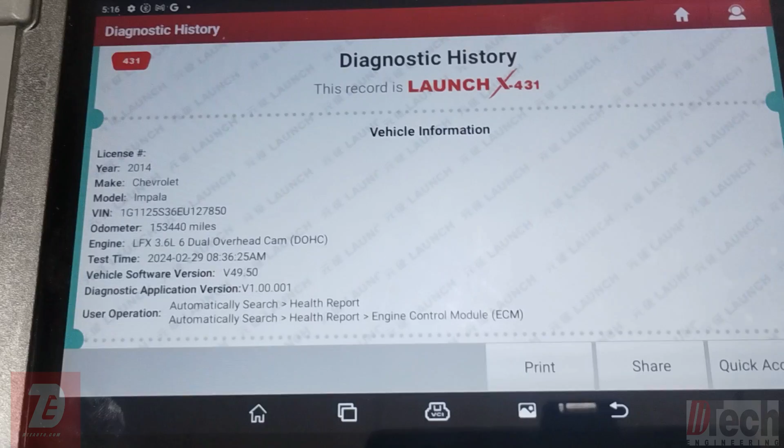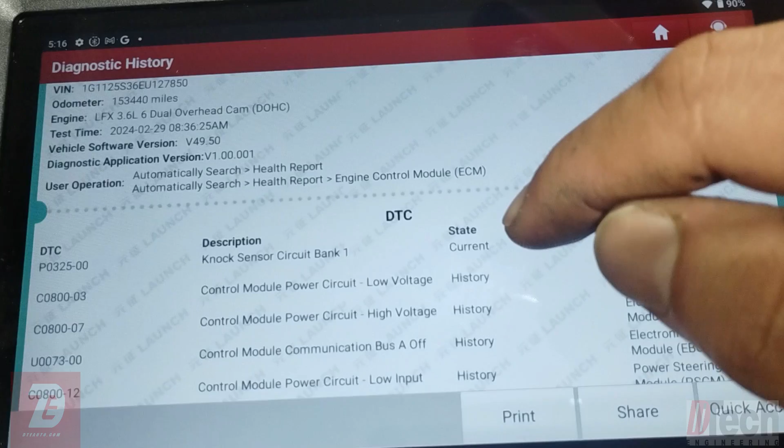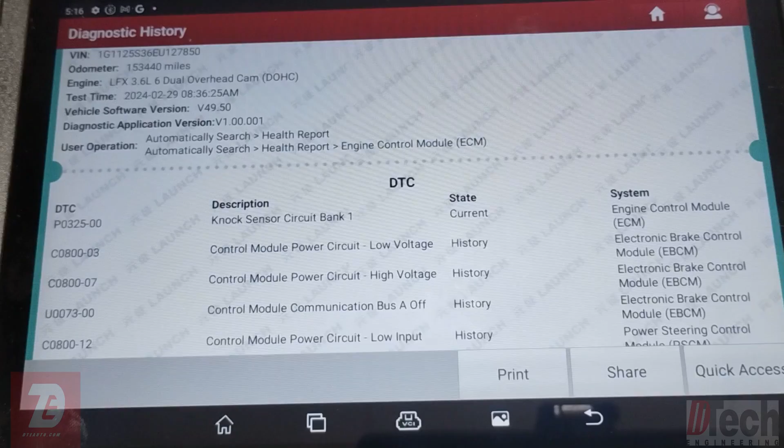They've done a few things on it trying to rectify the problem, but they still keep getting a trouble code. Here in the engine computer, currently present, it's a P0325 knock sensor circuit bank 1. And if I'm correct, I believe they were also getting the same code for bank 2.

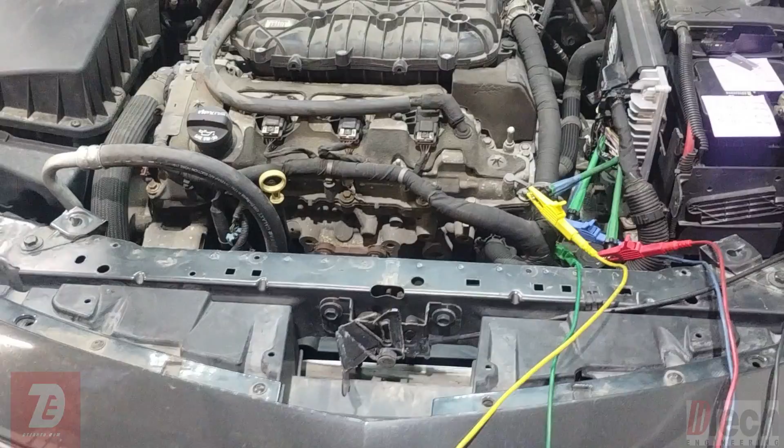Some of the things that they have tried: knock sensors, computer, jumping the wire harness, and then I told them to get a set of factory knock sensors, and supposedly they were still having the same issue. So that's when they decided to bring it down to me, and this is where we are at.

This is my first time trying to diagnose a knock sensor issue on one of these GMs. So my approach is to take a measurement of the circuits for each bank and just see what's on there and take a look. Just to get you a quick shot, this is the computer.

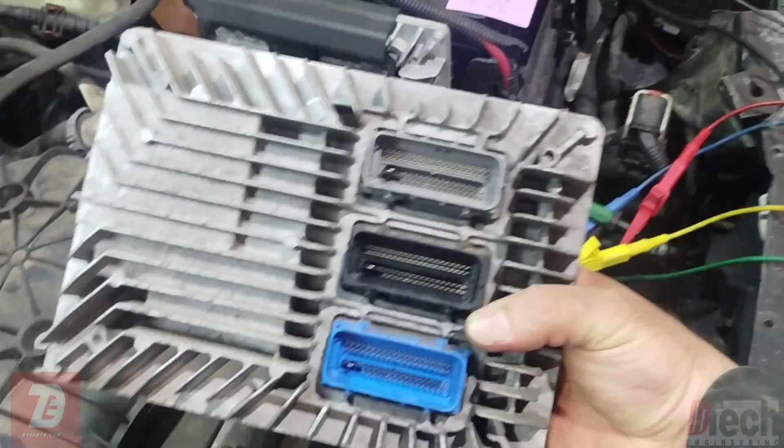I told them leave it in the car, and you can tell they've got a freshly painted one in there, but of course that did not make a difference.

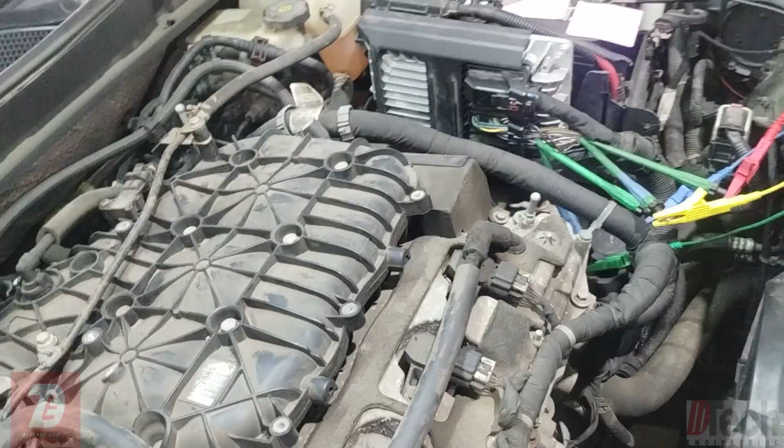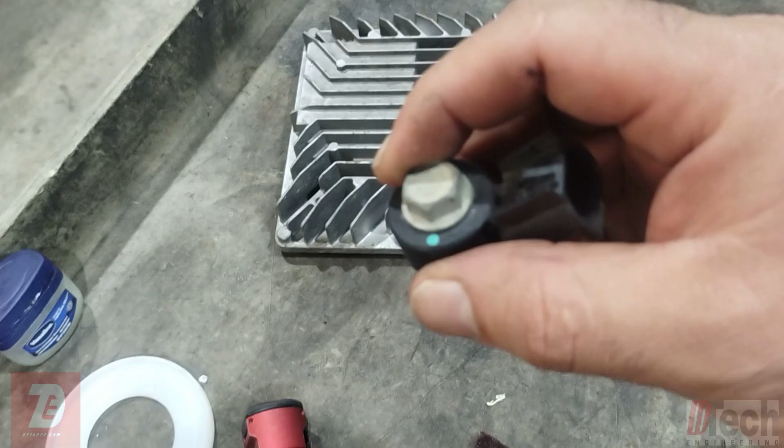I believe this is, not sure if it's the one I took off of the car or what. I have a used engine over on the other side where I took the knock sensors off while doing some testing, so I'll get you a shot of that. But for now, let's see what kind of signals we get.

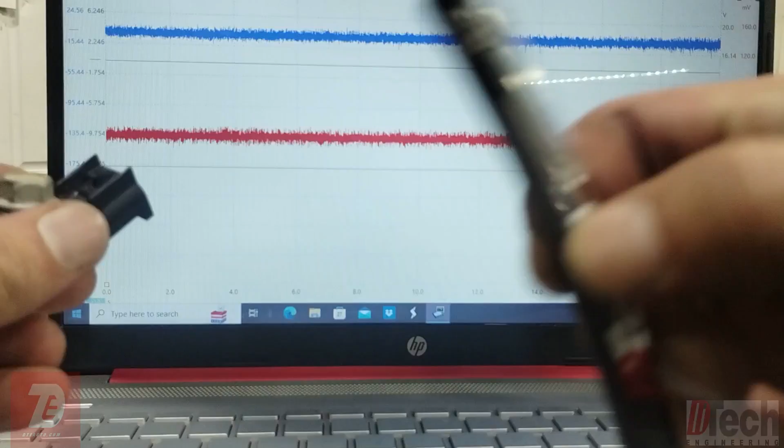Now, as far as testing knock sensors or this knock sensor system, it's no different than the chassis leads that I hook up to the scope. So all I have to do is tap into the signal line and basically just knock on the knock sensor, and we should generate a signal on there.

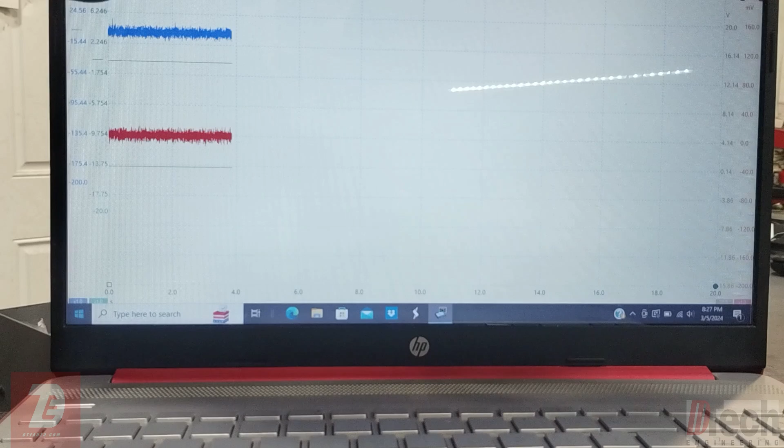As far as my channels, the blue is bank 1 signal line, the red is bank 2 signal line, and then, not for this first step but later, I am monitoring what they're calling the low reference, or basically the ground for the corresponding one. So green is going to be the ground for bank 1, and the yellow gold channel is going to be the ground for bank 2 on the red channel.

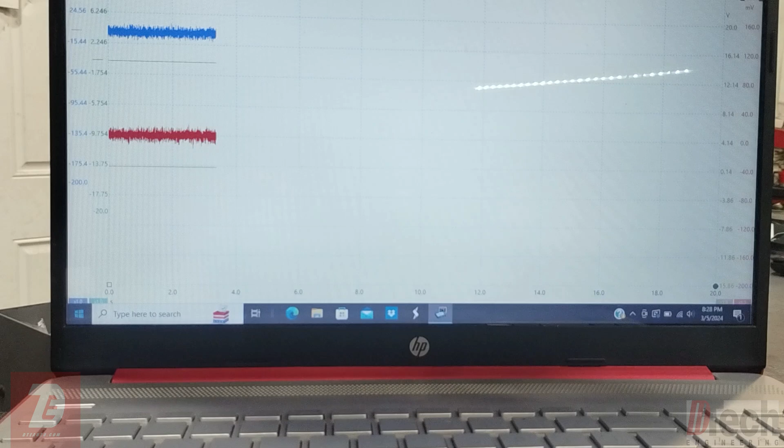So for right now, I am going to go and tap on the knock sensors and see if we can generate a signal. I'm tapped into the wire up at the computer, so we're all the way back up the harness right at the basically entry point of the computer. So we're going to try to capture everything up to that point.

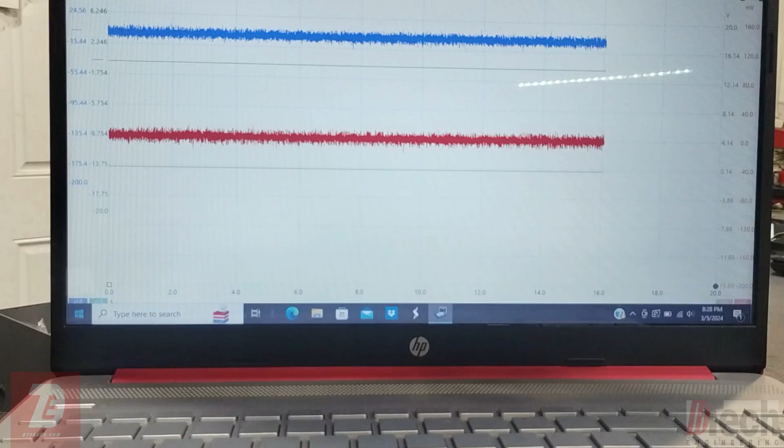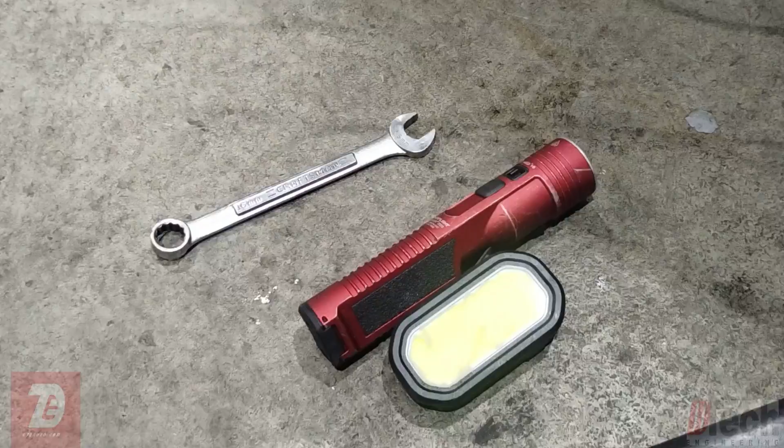Alright, so we're going to go underneath. I'm going to get you a shot of the knock sensors, and I'm going to use this wrench to knock on it.

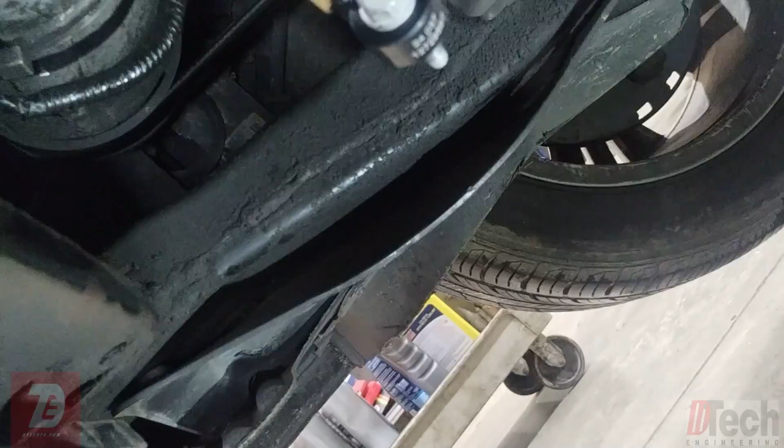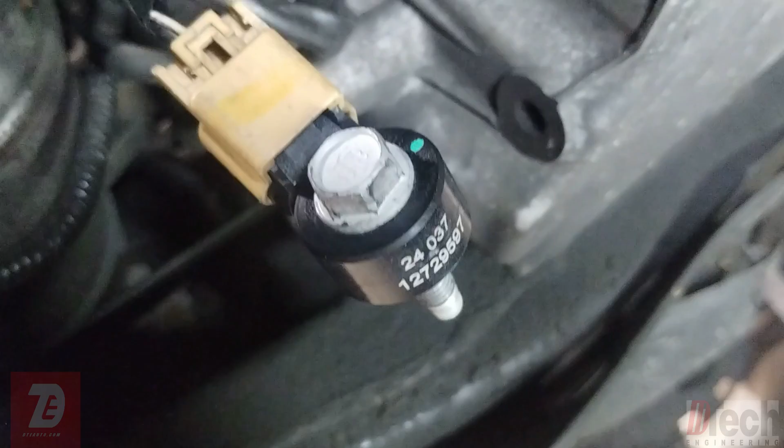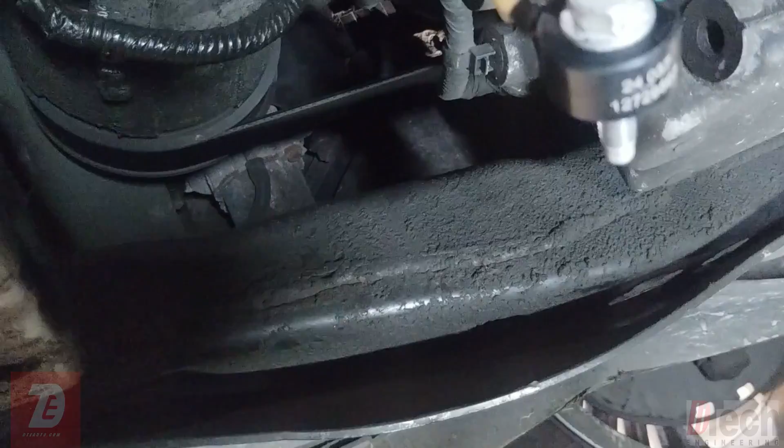So currently I've got the bank 1 knock sensor replaced, and that one is actually the one that they purchased and bought. So that's the new one, and I do believe that's the correct part number for a GM knock sensor. So I'm going to go ahead and tap on that, and then I'll get you a shot of bank 2. Tap on that, and then we'll get back on the scope.

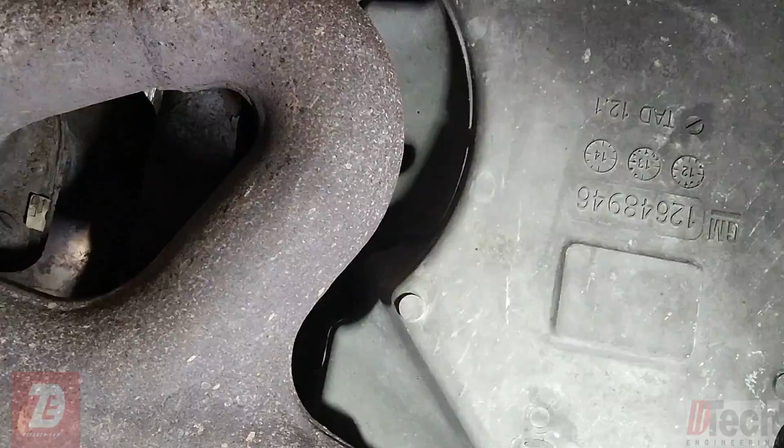Alright, that's bank 2. Let's go to bank 1. Not sure how well you'll get to see, it's up there pretty tight, but...

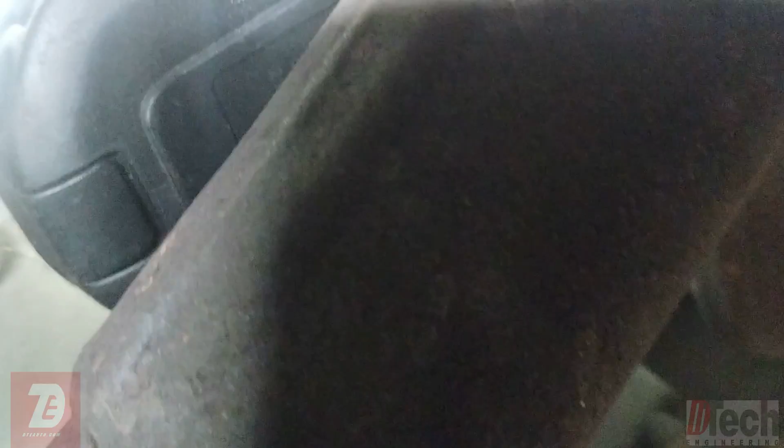Alright, let's go take a look. Before we go up, I just wanted to get you a shot, and there you go. There's the new knock sensor that they put in. And this is bank 1, the one that is throwing the code.

Alright, we'll go ahead and stop this. Let's go back. Alright, so there's bank 1, and there's bank 2.

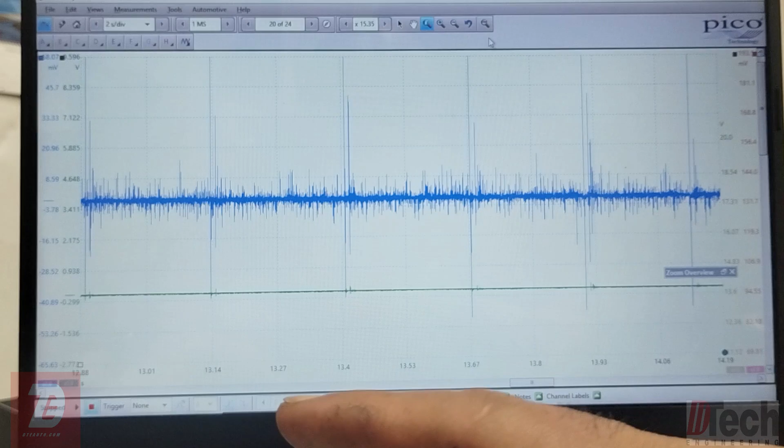Alright, so that was not expecting that. Bank 2 is the front one, the one that's hanging. And we definitely are clearly getting different amplitude levels. So yeah, see, there's bank 1, I was definitely on it. I would have thought possibly would have gotten higher amplitude than this. So, obviously compared to it, it's just night and day.

Let me try knocking on them again. Since we're getting different amplitude levels, I'm going to tap a little bit lighter on bank 2, the one that created a higher amplitude. Then I'll go to bank 1, the one installed on the block, and tap on that much more forceful, to see if our amplitudes change or if bank 1 is still a weaker signal.

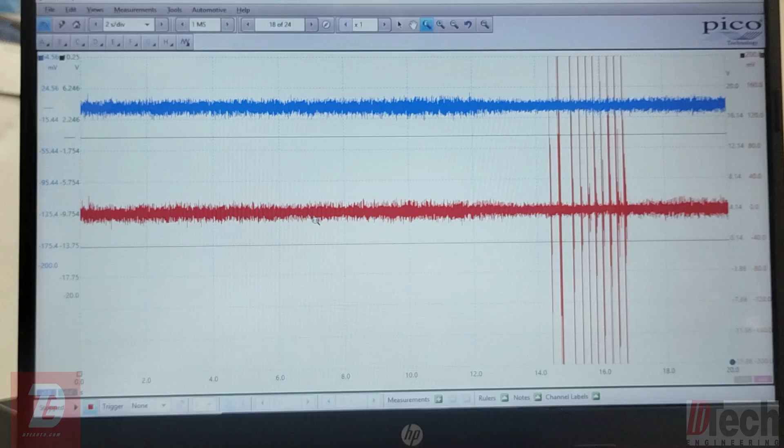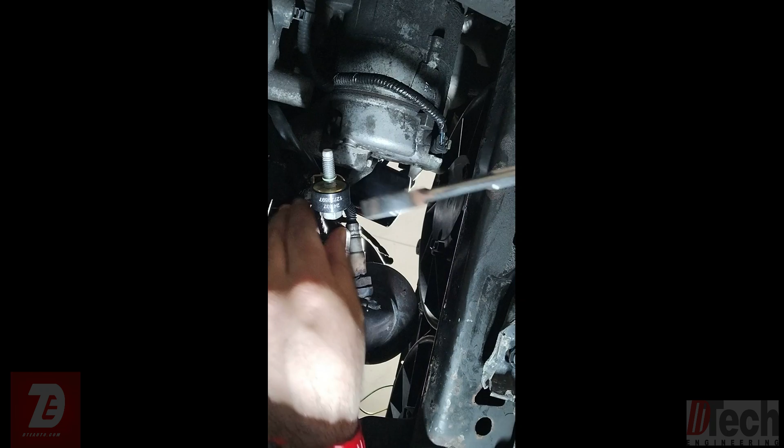Alright, we'll go light on this one. Hopefully you can audibly pick out how light I am going. It's real light. Now I'm going to go hard, just so we can tell a difference on the same bank. I know you can't see it, but hopefully I'll knock loud enough where you can tell I'm knocking harder. So here we go.

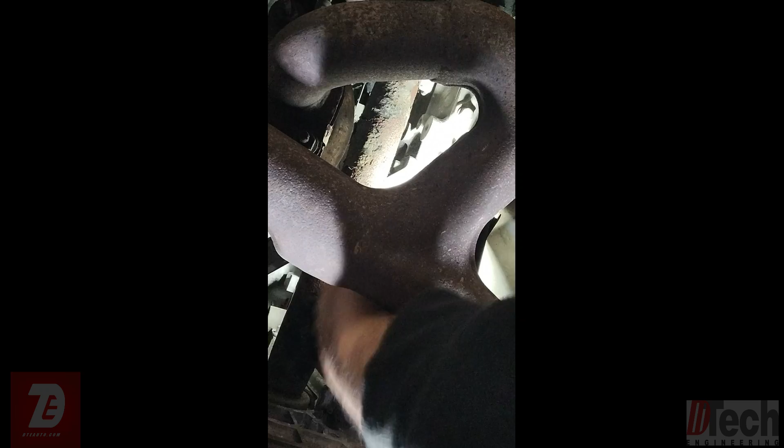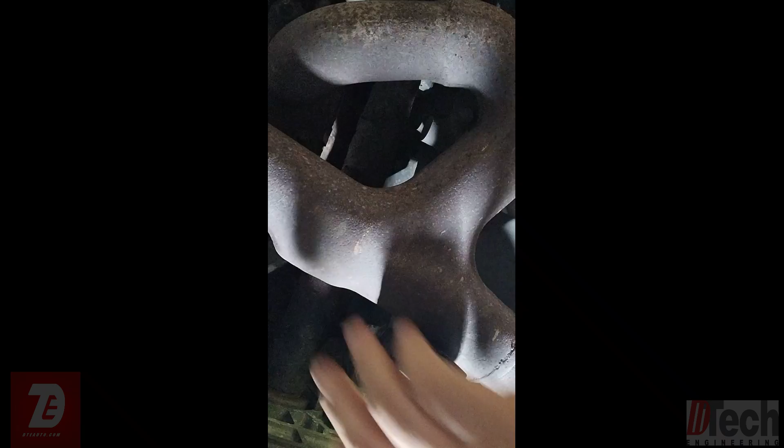So definitely harder than bank 2. Let's go take a look. Alright, let's stop this and let's go back.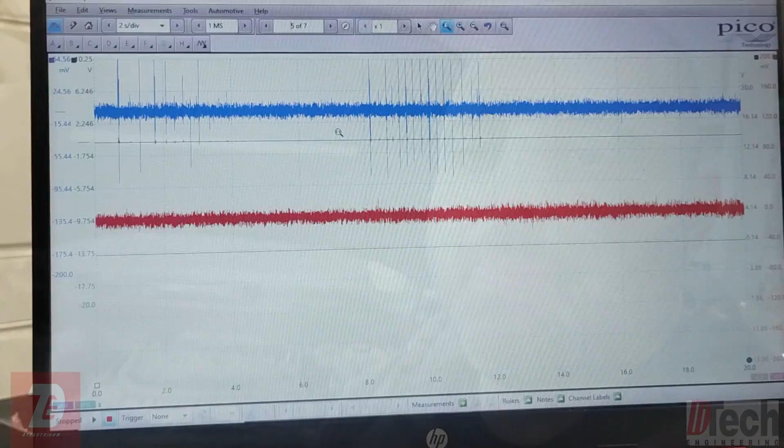Well, a couple things so far as to what we have basically learned just from that quick test. Our signal lines are good up to the computer. Second, our amplitude levels are different bank to bank. I know they told me they were chasing both banks' knock sensor code. I don't specifically know if it was this same circuit code, but me having it here right now, I'm only retrieving bank 1 code.

Basically what I'm getting at is if these two new GM sensors are installed, and with the tapping test, bank 2 in the front is crazy responsive compared to bank 1, where we can barely get a decent amplitude despite tapping on it even harder. So I'm curious if maybe by throwing these two sensors on, they got rid of the bank 2 code, but still have a bank 1 code because it's not a strong enough signal to keep that computer happy.

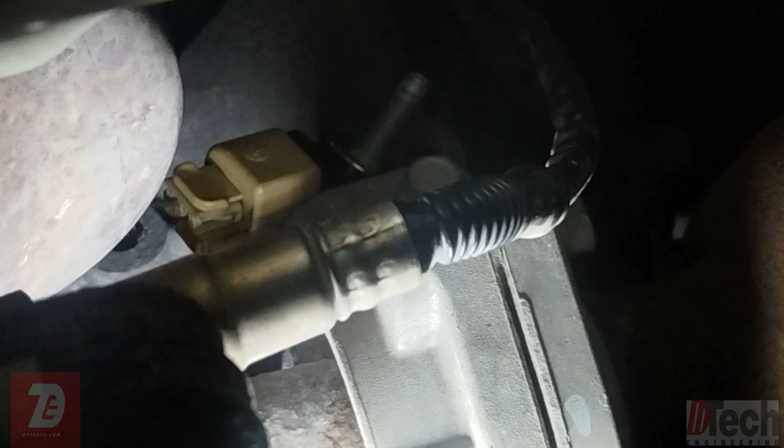Right there, the wiring - one of the pins has come out. Hopefully you can see that. So yeah, I bet that's going to contribute to our signal being low, and not being a true sensor issue.

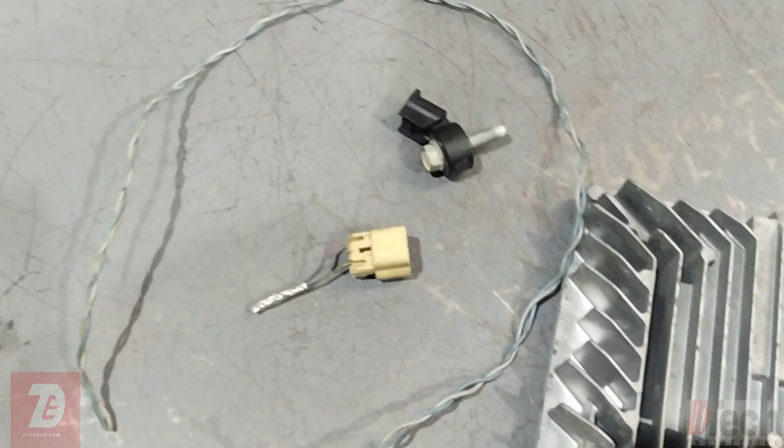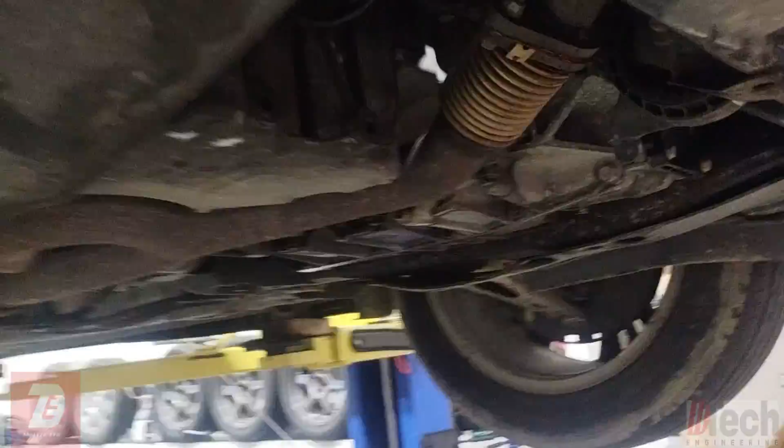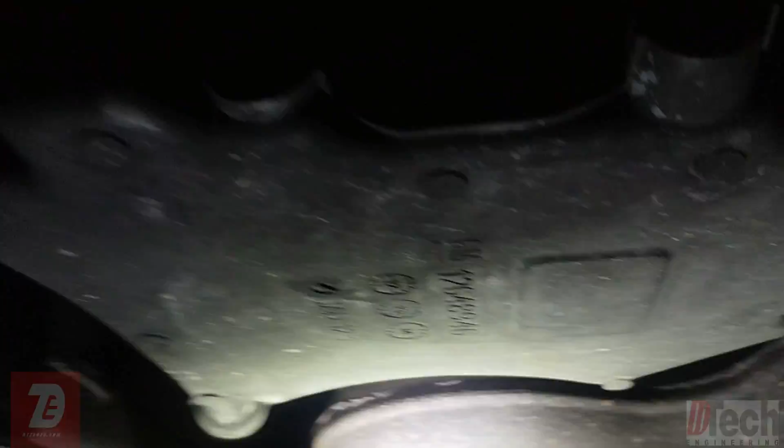Alright, so we ended up cutting this off, and I had a spare pigtail off a used harness, and we routed a new line to the original knock sensor that they had bought and installed. Now both are bolted back up into the regular position they go in, and all we're going to do is knock on both of them and see if the amplitude has changed or is great.

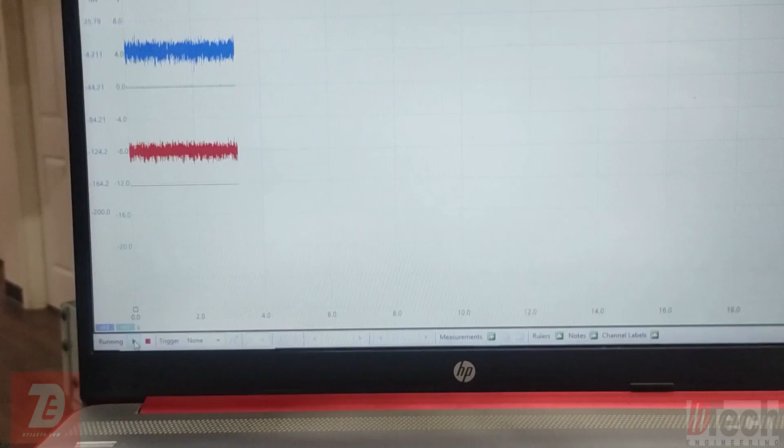So again, we got the same channels. Blue is bank 1, the one on the back that we were having issues with. I'll go ahead and knock on that one first. I'm not doing that hard of a tap, and the amplitude is great - definitely greater than yesterday with the pigtail not fully inserted. So I'd say that's a fix for that, and we'll go to the front one, which is bolted up. That one was working fine yesterday, so I'd say this is probably going to be fixed.

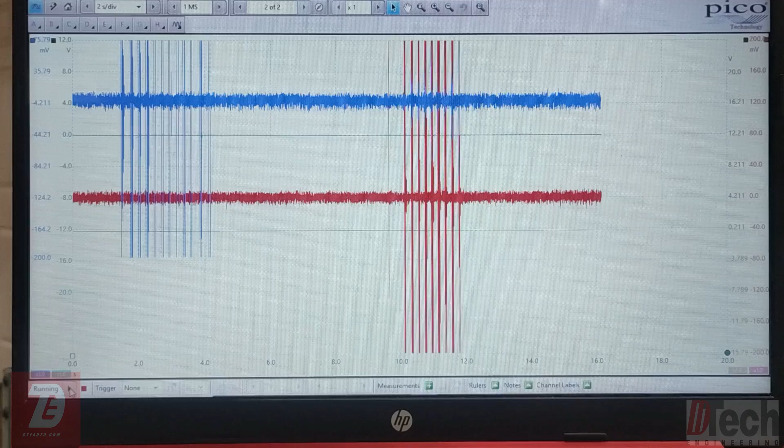We're going to clear the code and start the vehicle, make sure both levels are about the same. Okay, so that is the voltages with the key on. We're going to go ahead and crank it up. I already cleared the trouble codes.

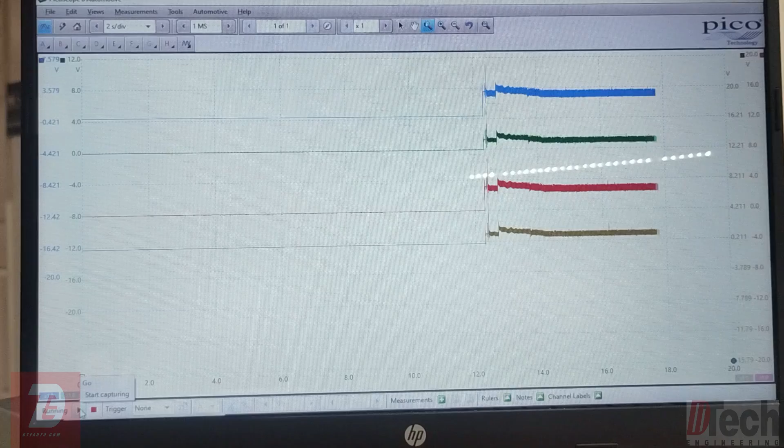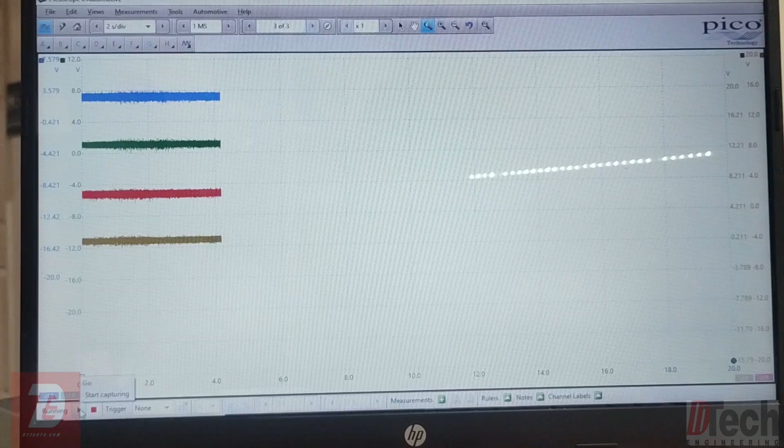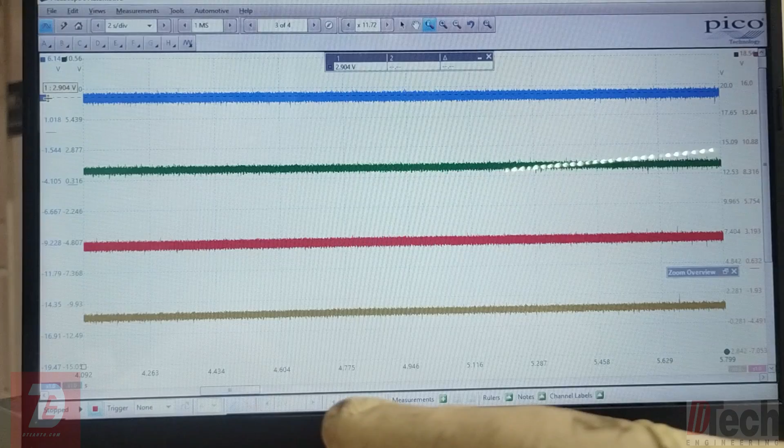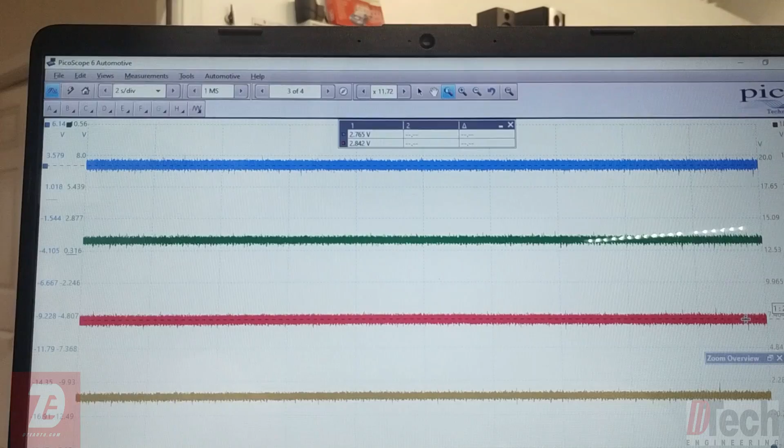Alright, let's just double check if both banks' signal levels are the same, then I'd say we are good to go. Let's measure the blue and red average voltage and see what we get. Alright, so yeah, both are about the same, about 2.7, 2.8 on the signal line while we are running both banks. I'd say we are good. Obviously no amplitude difference there while we're idling and running, so I would call this a fix.